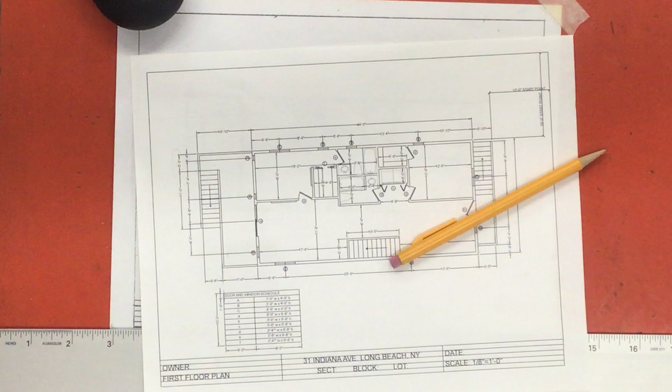Alright, so today we're going to talk about dimensions. What you gotta do is look for the outside dimensions first, and then we'll worry about the inside dimensions after. When looking at the outside dimensions, you want to see if there are two sets of dimensions or one set of dimensions.

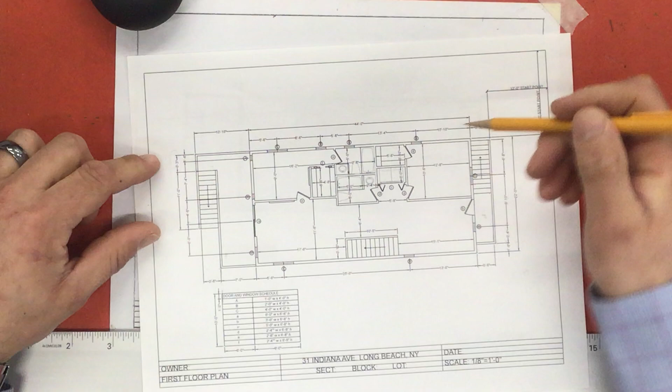On the side, you're going to see the stacked dimensions. You have an inner dimension and an outer dimension. Here you have an inner dimension and an outer dimension, and an inner dimension and outer dimension. You want to try to make this uniform. You want to make sure all the dimensions line up, and all these ones line up, and that your numbers are in the center of your gap as best you can.

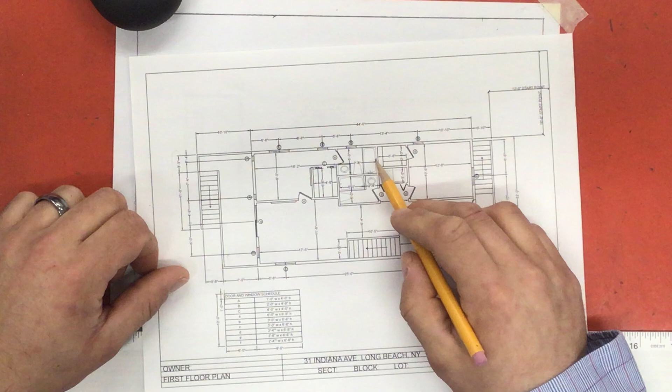When you get to the inside dimensions, you want to make it so that they are legible, and they don't take away from the drawing too much. So even if they've got to kind of cross over each other, you try to make it so that you can put the numbers where they're not going to be in the way. All right, so I'll do a few with you. I'm not going to do them all.

But the cool thing about when you're doing the dimensions is you can kind of start to darken up your drawing. So what I'm going to do is draw some extension lines. But while I'm doing my extension lines, I'm going to darken my visible lines that I need here. So I'm going to need an extension line that comes out here. And draw that lightly. I'm going to lift my pencil right before I touch the edge of the drawing.

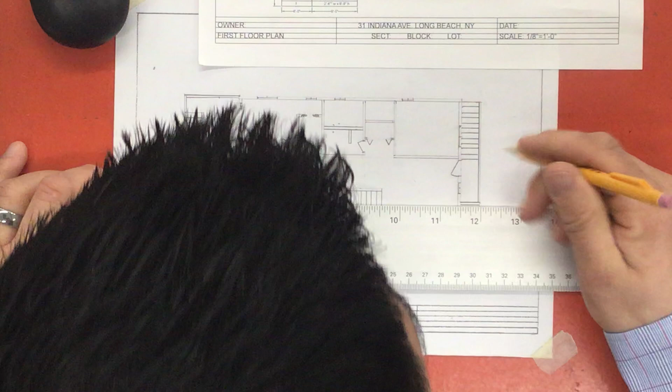I'm going to darken this entire line as I go across my paper. Right as I get to the edge, I'm going to lift it, and I'm going to draw an extension line out. I'm going to work the dimensions on the right-hand side right now. Okay, so from here, I'm going to darken my line, lift my pencil, draw my extension line out. My next extension line is the center of this window. I leave a little gap between the extension line and the window, and draw the extension line out.

Next one is the center of this window. Leave a little gap, draw my extension line out. The corner of these stairs, draw an extension line out. And then the actual corner of the house. So that one again, I'm drawing an extension line on this side, lift my pencil, darken my entire outside line of my drawing. I get to the end, lift my pencil, and then continue my extension line out.

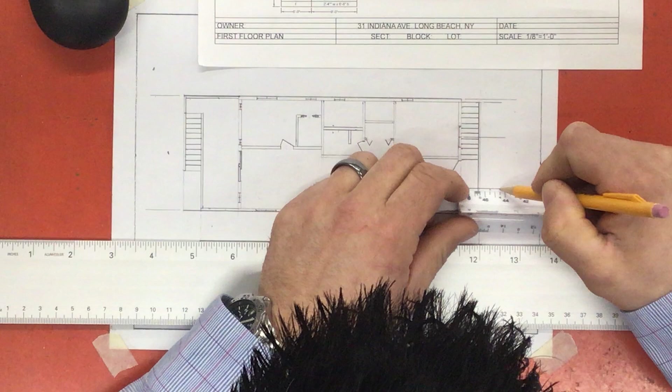Now that I have these extension lines on the right, I'm going to make two measurements. Okay? Easiest one to probably do is just go 2 feet and 4 feet. So 2 feet and mark 4 feet. Alright? At the 2 foot mark, you're going to draw your inner dimensions. Alright? And that's going to be these lines here with your pencil.

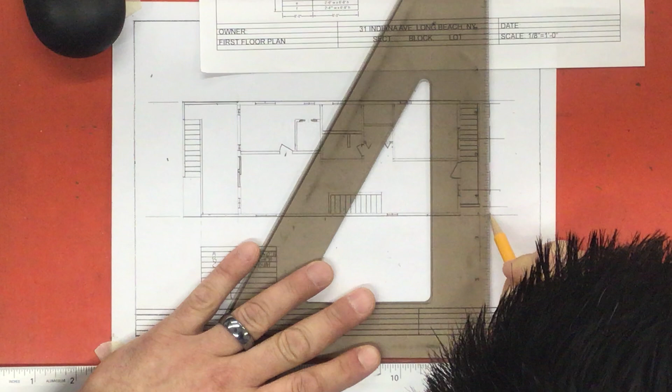I actually cross across the extension line, go to the middle, lift my pencil for the gap, come back down, cross across the extension line, lift my pencil, cross, lift, cross. When I come out to the outer extension line, what you're going to notice is it's basically the entire length and no other extension lines cross it.

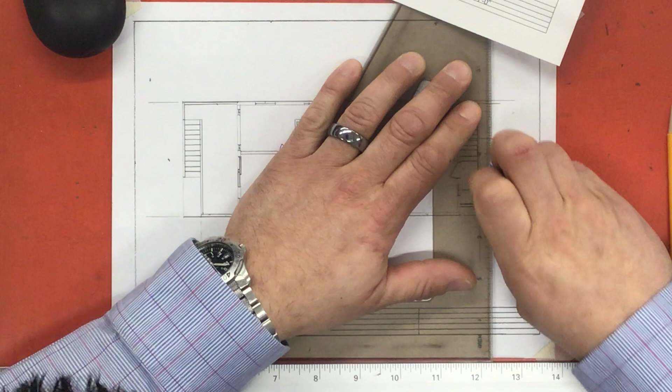So the first thing I'm going to do is come with my eraser and go just past my dimension line I made originally. I'm going to erase any of these inner extension lines. Okay, I have to shorten this one up a little bit. I want to leave a little bit of tail past them, a little bit of overhang, but not a ton.

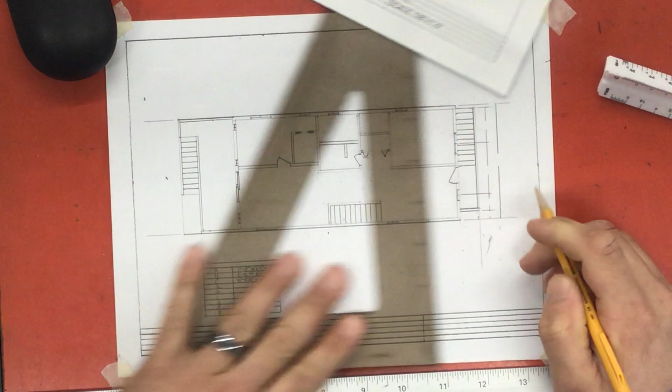Okay, by accident there I erased my measurements, so I'm just going to go another 2 feet, use my triangle, and I'm going to draw down my longer dimension line. Now, to clean this up, I'm going to put my arrowheads on the end.

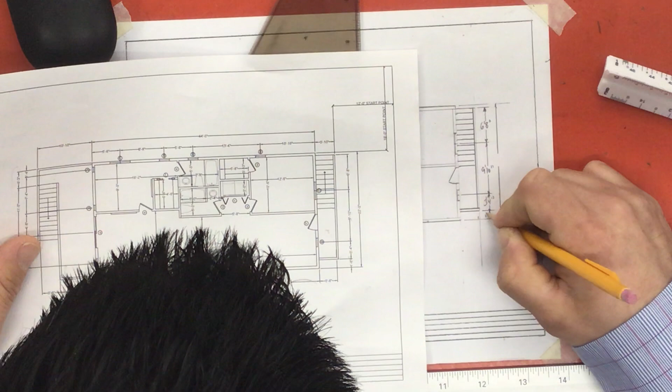Okay, arrowheads. These ones are small, but you can still see them. When I do my arrowheads, they point at the extension line, and then you write the number in the middle. 6 foot 8 inches, 9 foot 10 inches, 3 foot 4 inches. This one's 1 foot 8 inches. This one's 22 feet dash 0 inches.

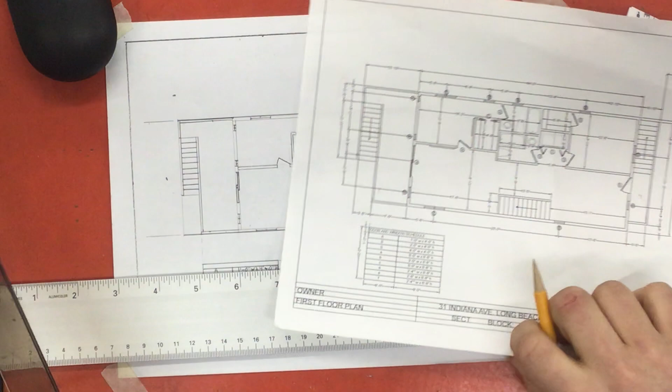All right, the extension line shouldn't go that far past the actual dimensions. Darken that up. I'm going to erase that up. Over here, I'm just going to darken this line up a little bit. All right, perfect. That's the side dimensions. Now let's do the bottom dimensions. These ones should be pretty easy.

All right, you just bring your extension line down. Make sure there's a little gap between the corner of the drawing and the extension line. And like I said to you before, these are going to be the ones that go across the bottom here. What I like to do is I darken up my drawing as I'm doing it. So I'm going to darken my line, lift my pencil, draw my extension line down. Come over here, darken my line, lift my pencil, draw my extension line down.

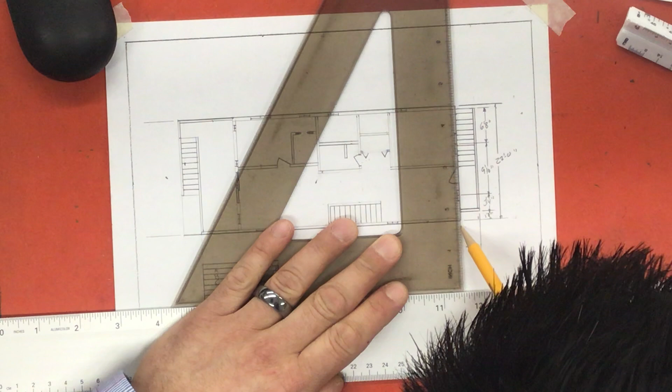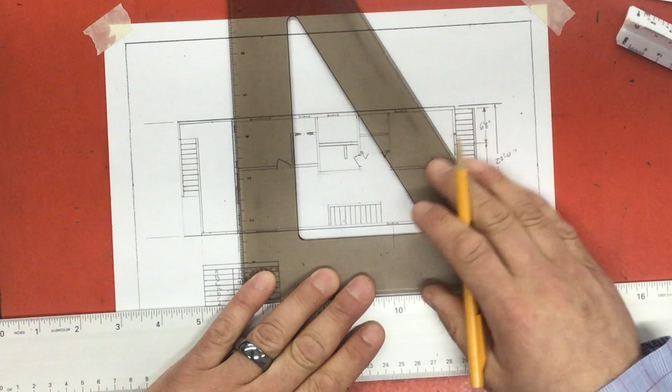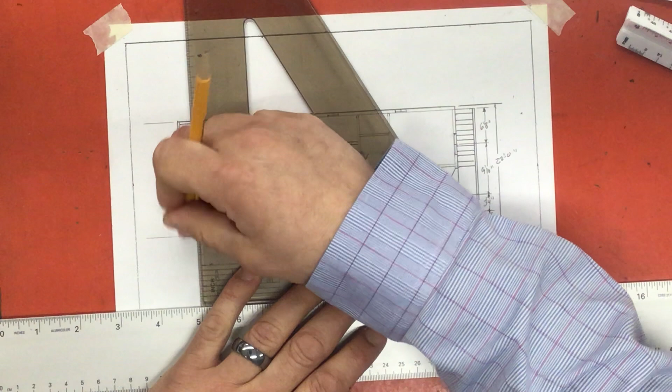My next one's gonna be the center of the window. Now some of these I'm drawing a little long. They probably don't need to be this long, but we'll just erase a little bit later, just not the darkened part. Right side of your house or the back of your house, darken it up. With your pencil, draw a line down. Edge of the deck, same idea. Down, always making sure you lift that pencil up right beforehand, okay? Erase this line here, and then draw my extension line down from here, like so.

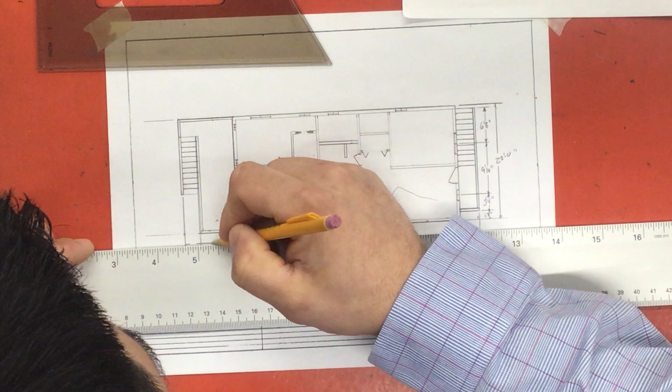Okay, this gets erased. And now I'm going to come down, I'm just going to measure 2 feet down and maybe 1 foot past that for the end of the extension line. Use my triangle, okay, my T-square I should say. I'm going to draw the dimension lines, leaving little gaps in the middle. I missed an extension line here. I'm going to drop this one down.

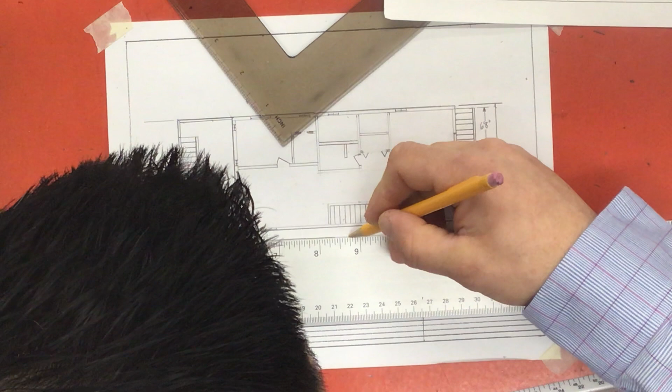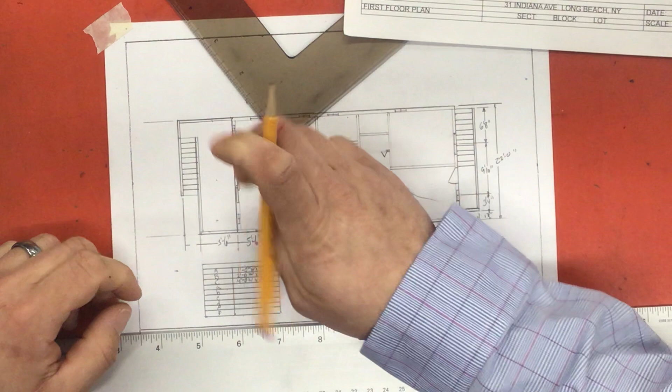Okay, this one's going to be 3 foot 6 inches, 13 foot 6 inches, 25 foot dash 0 inches, 5 foot dash 6 inches. This one's actually 7 foot. Okay, this is 5 foot dash 6 inches. This one's 7 foot dash 0 inches. This is 3 foot dash 6 inches. Go back, add your arrowheads. Okay, small, little, dark triangles. Arrowheads, they point at the extension lines.

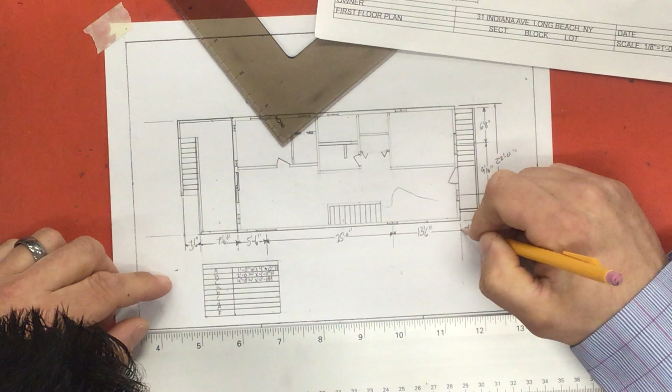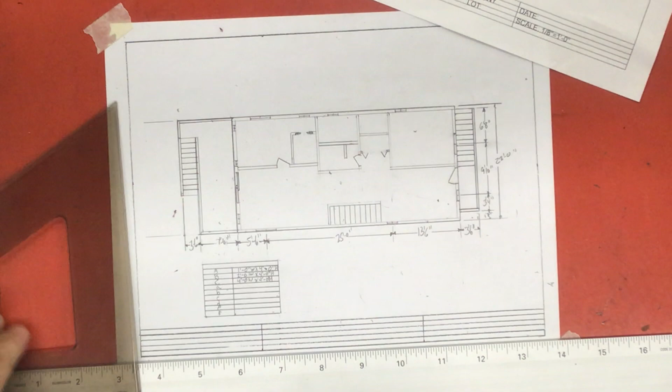Okay, use your T-square, slide it up. Use your eraser. Erase any extension lines that go past the bottom of the T-square so you make it more uniform. Lastly, we'll just do the inside ones. Okay, when you're doing the inside ones, if you're getting the smudges, once again, you can always put this stuff on. I'm just going to do the inside ones in a couple of rooms. So over here, touching the outside wall, bringing your line down, lifting your pencil, bringing your line down. This one's going to be 10 foot 6 inches. Make sure you use your arrowheads so there's no confusing that it's a dimension line.

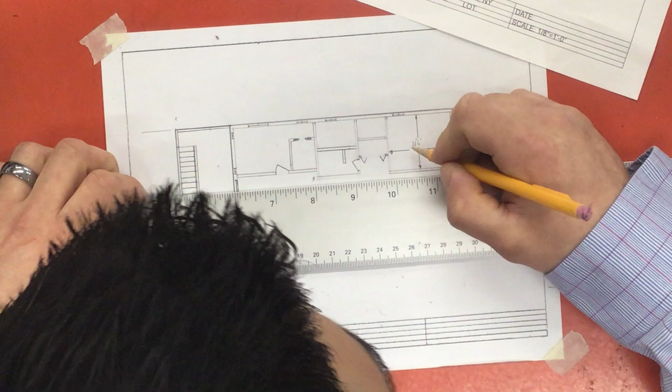All right, this one here, we're going to make 12 foot 8. Okay, so bring your line across. That doesn't have to be exactly where I did it on mine. It could be close or somewhere near it, just as long as it's not confusing looking. All right, this one's going to be 12 foot 6 inches. Hopefully you can make it nice and neat. When it comes to the closet over here, same idea. Draw your line across. This one's going to be 5 foot 8. And up and down, you got 3 foot 10 inches, kind of like that.

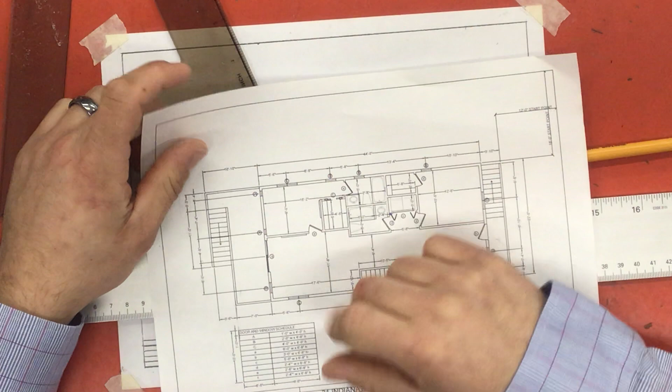All right, so that's basically how you're going to set your dimensioning up. You got to do all the dimensions for the interior. You're going to have all your doors done, all your windows done. Do not worry about the toilets and sinks. And that's all you're going to need to have to do for tomorrow. Let's get to work.